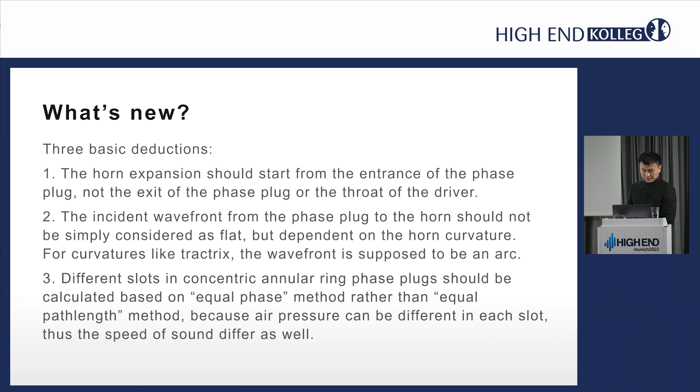Okay. So the starting point of the horn expansion. Due to historical and industrial reasons, current drivers and horns are always designed separately, tested separately, and teamed up at will. So, for example, if you have a TAD driver like 2003, 4003, you team up with a horn that you like, and you try different kinds of combination and feel, okay, this is better, this is not. But that's not what it is supposed to be, because the driver itself has a curvature of its own. It does not match any horn that you put together with it.

This brings us to a question: should the horn expansion rate only be applied to the horn itself or the driver as well? I believe in the latter, and that drivers and horns have to be designed together. So one horn model only matches one driver model. It is easy to see that the throat of the driver is merely an extension of the horn, so it should also follow the same formula applied to the horn.

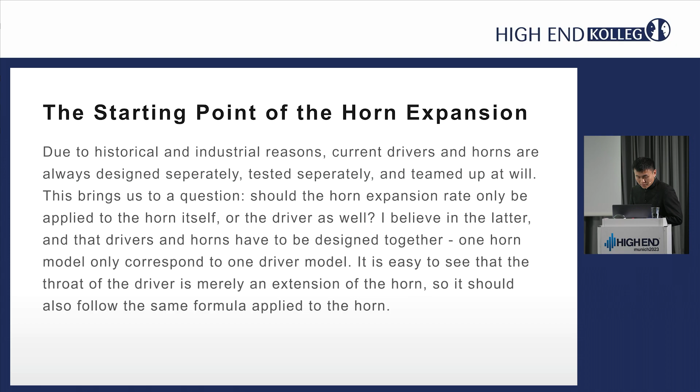So as you see, the left one, the curvature from the horn to the throat of the driver is consistent, so it's very smooth. The right one, the horn has its own curvature, and the driver has its own curvature. So it has a sharp turning point where they connect to each other. That way, the sound going from the throat to the horn will not have a smooth expansion.

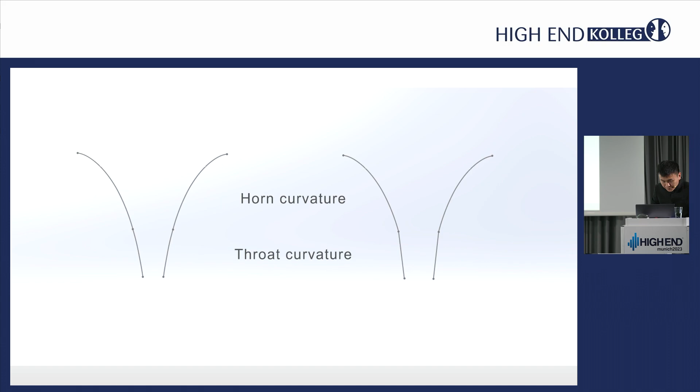What about the phase plug then? When we talk about compression ratio, we are always referring to the total exiting area of the phase plug compared to the total surface area of the dome. But in fact, the compression is done at the entrance of the phase plug, where a big amount of air pushed by the dome has to be squeezed into much smaller slots. From there, all the way to the mouth of the horn, the air is always expanding and not compressing. By this logic, the slots of the phase plug should also follow the expansion formula of the horn.

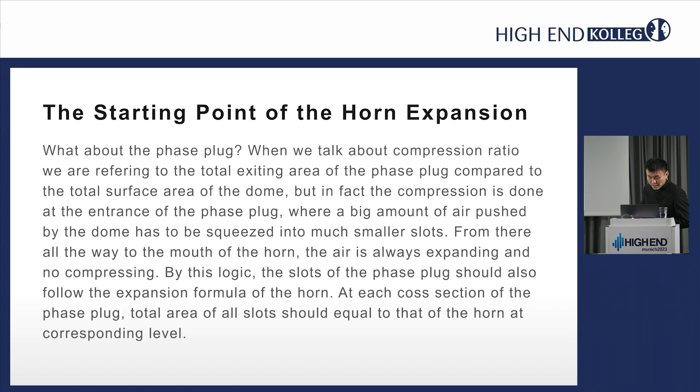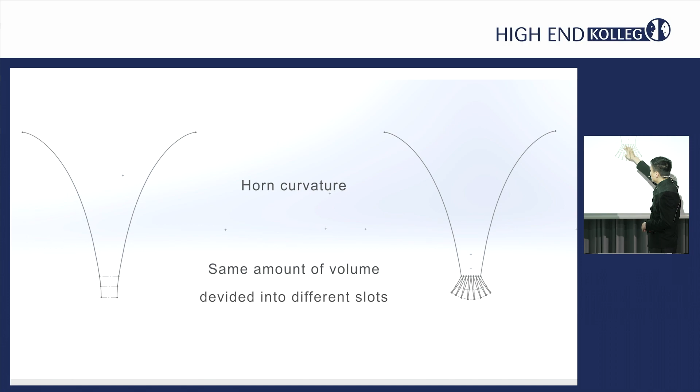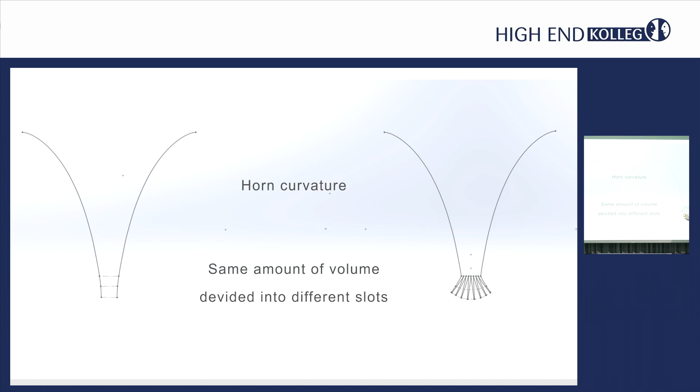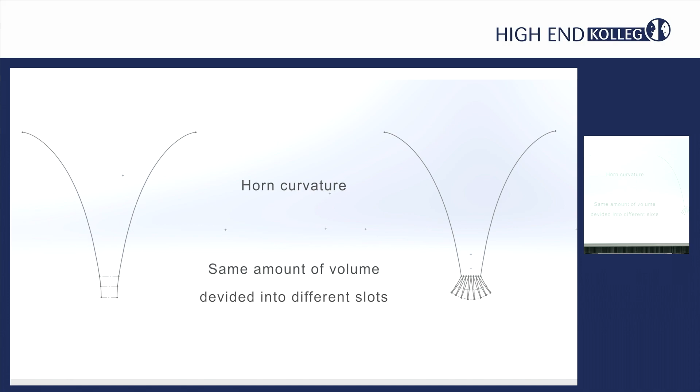At each cross-section of the phase plug, the total area of all slots should equal that of the horn at the corresponding level. So what does that mean? As you can see, on the left side is a horn curvature all the way down. On the right side, you have this phase plug, and this area is equal to this area. And this area should also be equal to this area, the combined cross-sectional area of each slot together. Like if there are 4 rings, the combined area of the 4 rings should be equal to the area of the horn at that level.

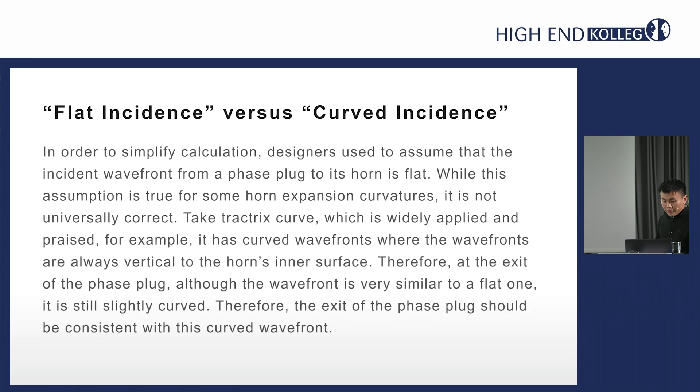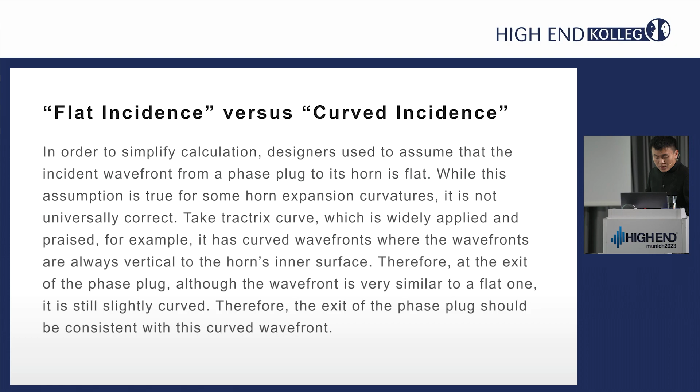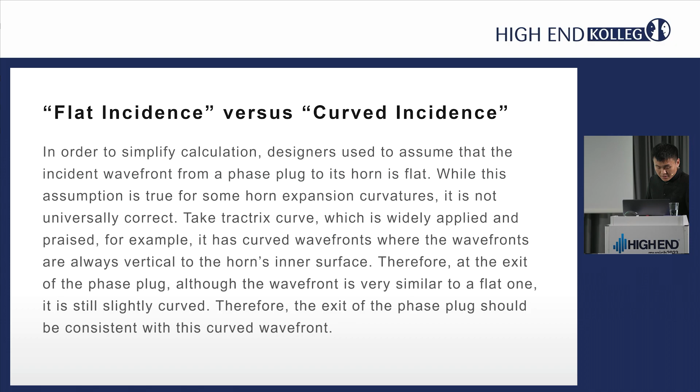In order to simplify calculation, designers used to assume that the incident wavefront from a phase plug to its horn is flat. While this assumption is true for some horn expansion curvatures, it is not universally correct. Take the Tractrix curve, which is widely applied and praised, for example. It has curved wavefronts, where the wavefronts are always perpendicular to the horn's inner surface. Therefore, at the exit of the phase plug, although the wavefront is very similar to a flat one, it is still slightly curved. Therefore, the exit of the phase plug should be consistent with this curved wavefront.

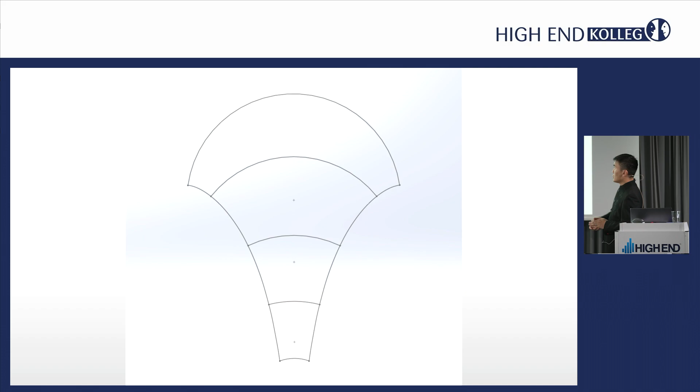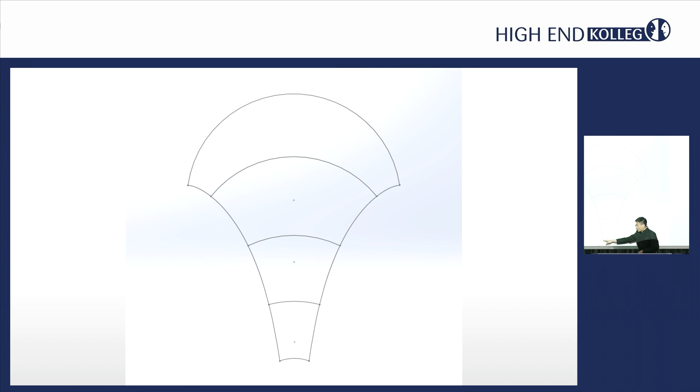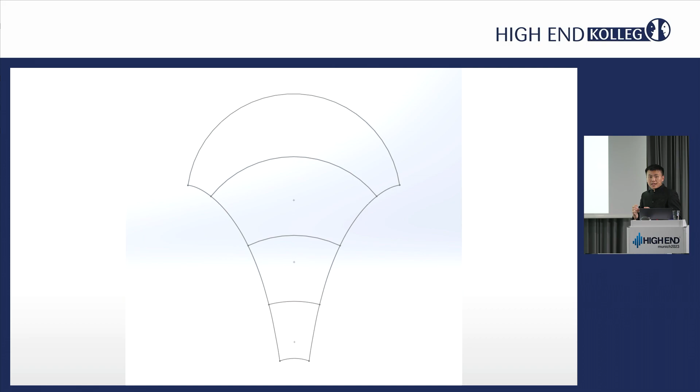As you can see here, it's a typical Tractrix curve where you see the wavefronts are perpendicular to the inner wall of the horn. And that's the exit, and that's where the entrance is, so it's still slightly curved. Before, we used to think that we can calculate it as flat, but it is not. They're still slightly different. If you calculate it as a flat one, the small difference at the entrance will make a big difference at the exit.

Therefore, this is an example of a phase plug designed to have a curved exit, where you can see the exit of this phase plug is an arc, not a flat one.

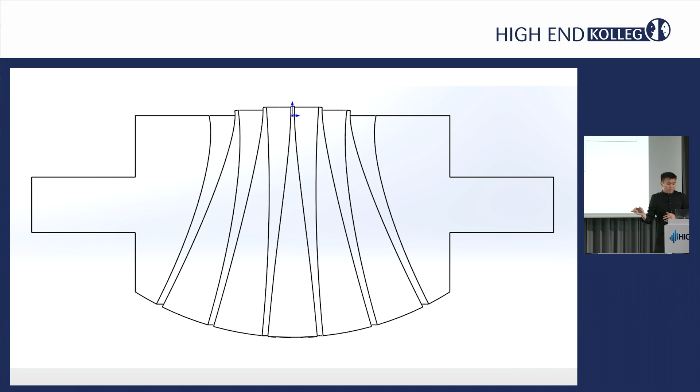Okay. Another thing about equal path length versus equal phase. Current equal path length design method is based on the assumption that the speed of sound in each slot is the same, by which we can achieve phase alignment by making the length of each slot equal. This method also requires air pressure in each slot to be the same.

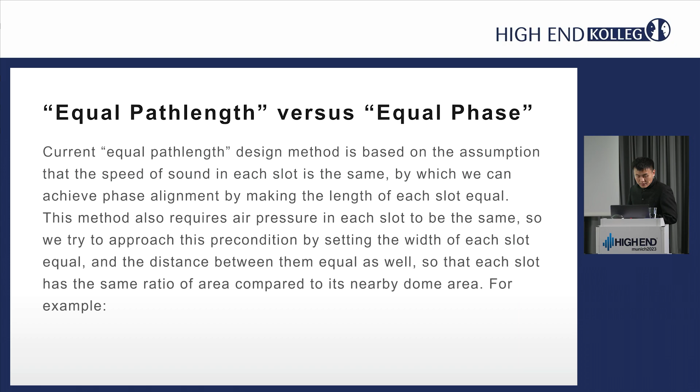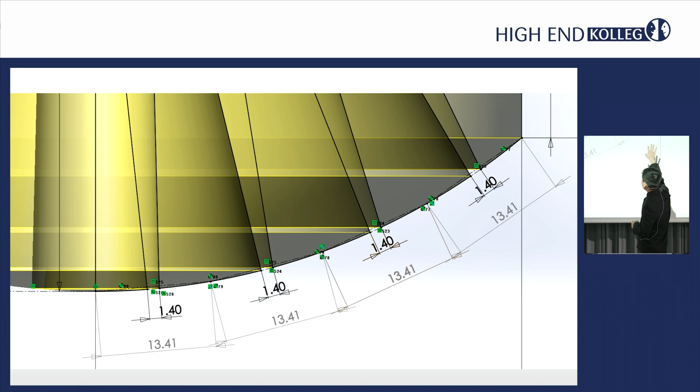So we try to approach this precondition by setting the width of each slot equal, and the distance between them equal as well, so that each slot has the same ratio of area compared to its nearby dome area. For example, here, this is a cross-sectional view of a phase plug where you have 4 entrances here, 4 slots. This slot takes charge of this area.

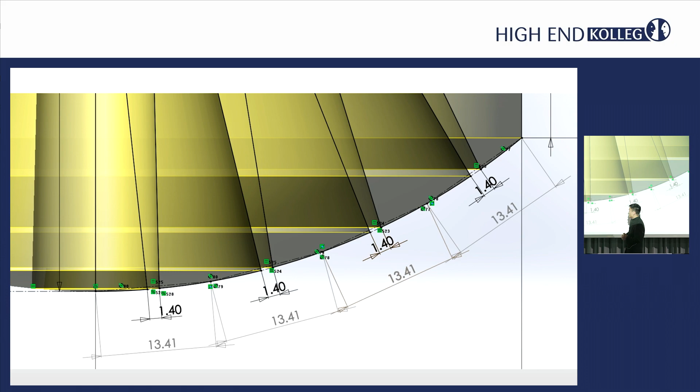So the air of around here from the dome to the slot mostly comes into this slot. This area always comes to this slot, and this area, so on. So you can see that in previous assumption, we always have the slot with the same width and also the same width of the area that it's in charge of. So that way the ratio remains stable, and the air pressure is also always the same between different slots.

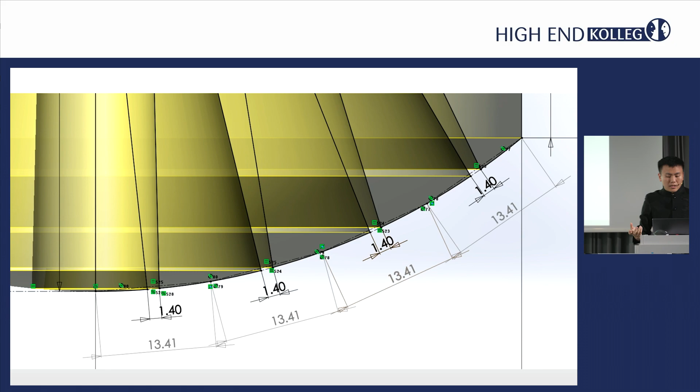That way we can achieve the assumption that the speed of sound in each slot is the same. That's a precondition that we can calculate with equal path length method. However, equal path length method helps to simplify the calculation of slot entrance, but it has 2 drawbacks. First, since the outer slots are closer to the exit, with equal path length method, we have to twist outer slots into S shapes to achieve equal path length. But winding paths would increase distortion.

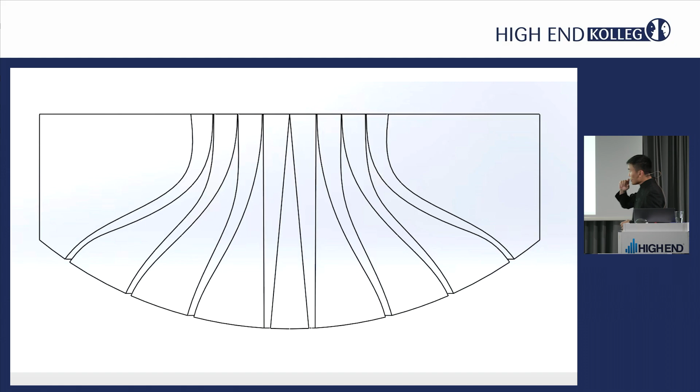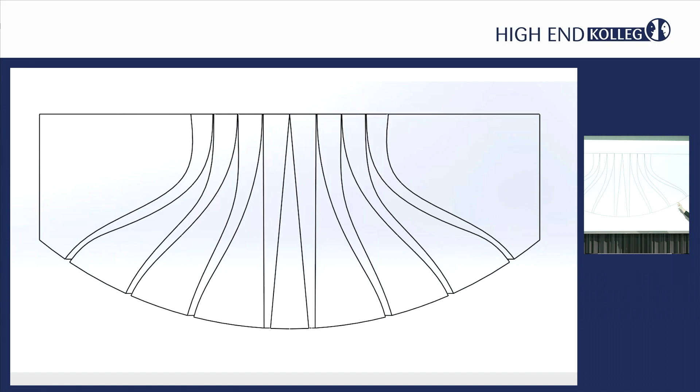What I mean is like this. So the path length from here to there, these 4, they are the same. Okay, but the problem, as you can see, is obvious. It's an S shape. The sound has to go an S shape from the entrance to the exit. That way, it surely creates more distortion.

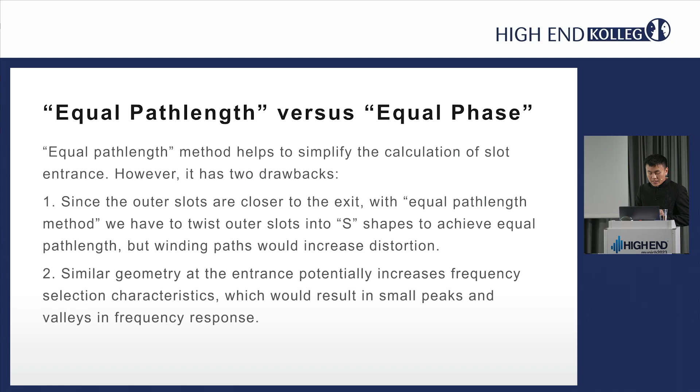The second one is that similar geometry at the entrance potentially increases frequency selection characteristics, which would result in small peaks and valleys in frequency response, since we have same width at each slot, so it's similar geometry. So what if we adjust like this?

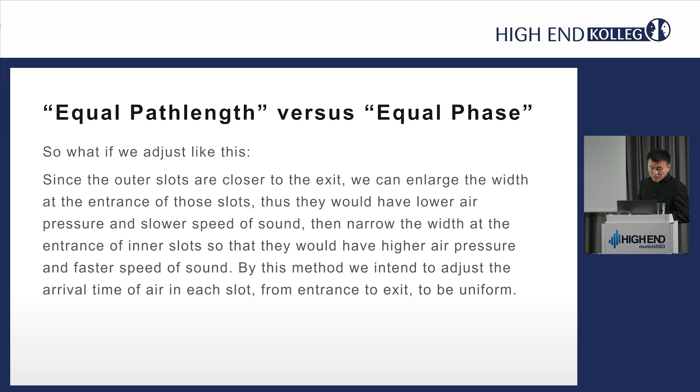Since the outer slots are closer to the exit, we can enlarge the width at the entrance of those slots. Thus, we will have lower air pressure and a slower speed of sound, then narrow the width at the entrance of inner slots so that they would have higher air pressure and faster speed of sound. By this method, we intend to adjust the arrival time of air in each slot from entrance to exit to be uniform.

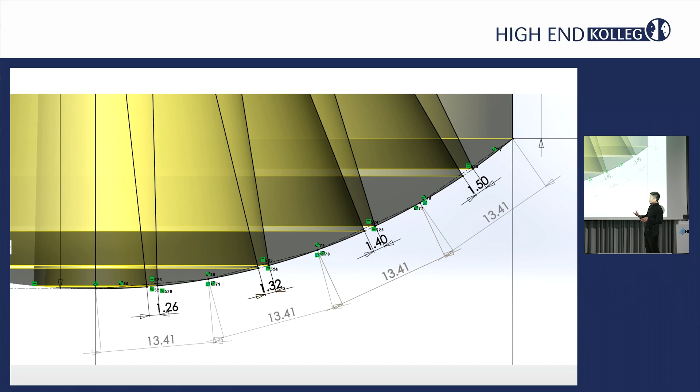In the length, if the length of each slot from inner to outer is A to B to C to D, then we have to adjust the slot entrance in such a way that the speed of sound in each slot also becomes A to B to C to D. Thus, we can also achieve phase alignment without the two drawbacks referred above about the equal path length.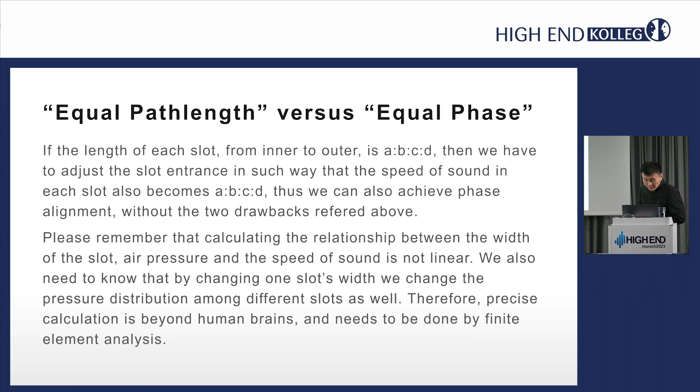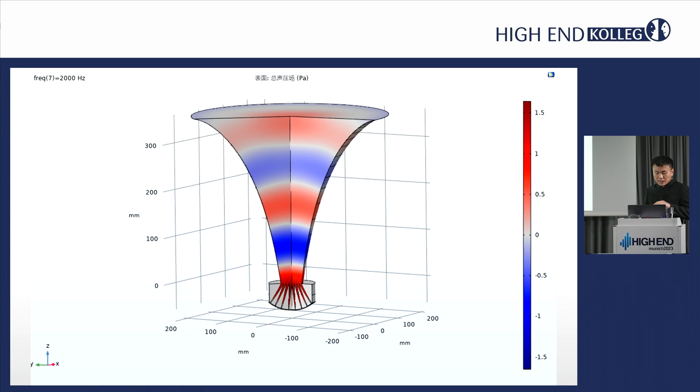Please remember that calculating the relationship between the width of the slot, air pressure, and the speed of sound is not linear. We also need to know that by changing one slot width, we change the pressure distribution among different slots as well. Therefore, precise calculation is beyond human brains and needs to be done by finite element analysis, like this. So this is a finite element analysis, and you can see clearly how the sound waves go out.

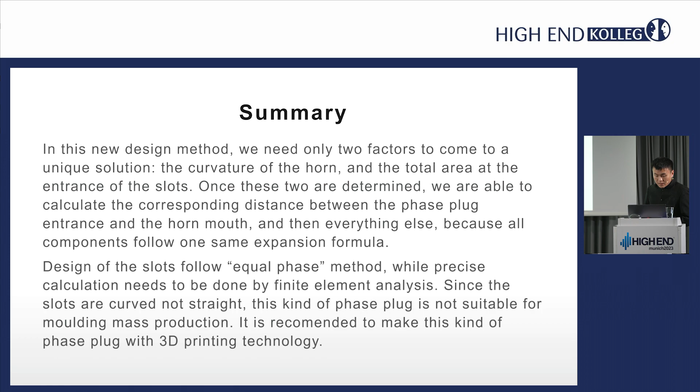So here's a summary. In this new design method, we need only two factors to come to a unique solution: the curvature of the horn and the total area at the entrance of the slots. Once these two are determined, we are able to calculate the corresponding distance between the phase plug entrance and the horn mouth, and then everything else, because all components now follow the same one expansion formula.

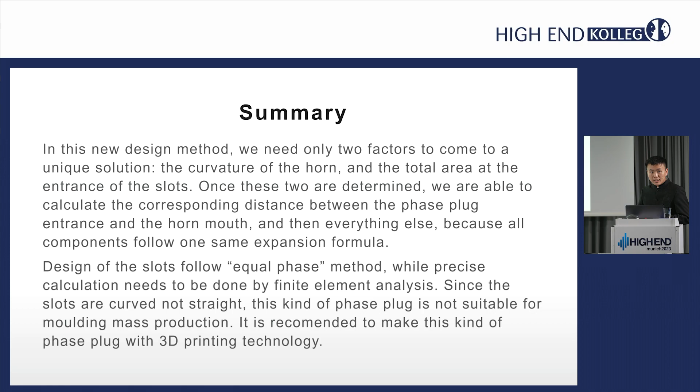Design of the slots follows equal phase method, while precise calculation needs to be done by finite element analysis. Since the slots are curved, not straight, this kind of phase plug is not suitable for molding mass production. It is recommended to make this kind of phase plug with 3D printing technology.